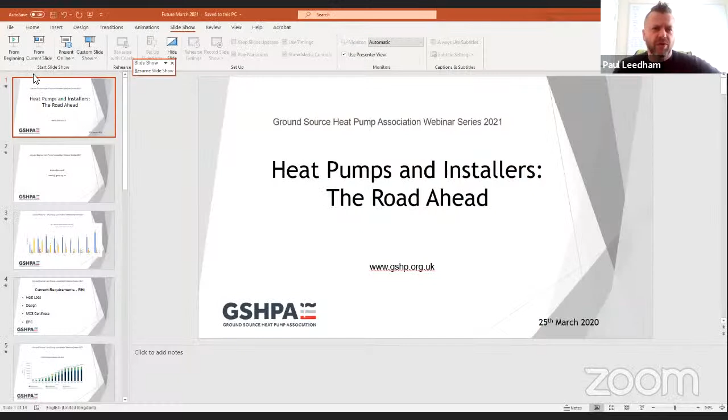My attempt here is to give you some kind of insight into heat pumps and installers and the road ahead. For the intuitive ones of the group, in the bottom right hand corner, you'll see that I wrote this a year ago. Actually, I am fibbing - I made a mistake with coronavirus and everything. It actually says 2020, it should say 2021. So, heat pumps and installers, the road ahead.

Here's some information with regards to contacting Ground Source Heat Pump Association initially, admin at gshp.org.uk, and gshp.org.uk website. There'll be some details if you want to ask further questions outside of this later with regards to Secretariat.

This is data that was gathered from MCS, Micro Generation Certification Scheme. This data relates to almost the last 10 years of the number of installations in the UK that have been registered through the MCS. The reason why I've placed this here is to give you an idea of the different technologies and the deployment over the years. As you can see in 2011, there's a relatively small number of air source and ground source installations.

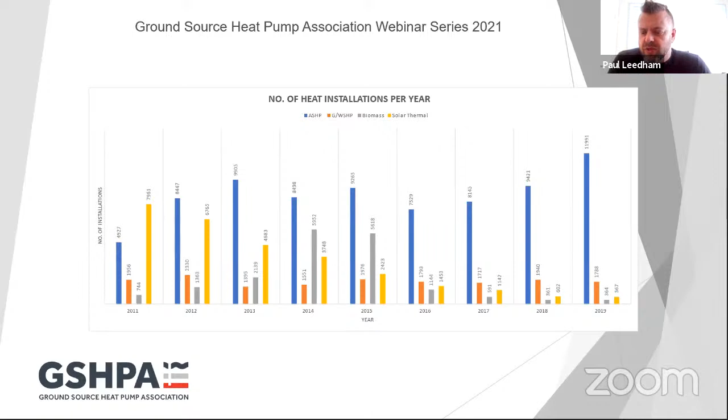Current requirements under renewable heating incentive - I know every installation doesn't necessarily go for renewable heating incentive - and the non-domestic renewable heat incentive is about to end this month, and we only have a year left of the domestic side. The requirements are, which is different to gas and oil in some respects, a certain size and scale.

Heat loss calculations need to be done so that we can size and scope the deployment of the heat pump. Design of the system, as heat pumps are less forgiving than gas and oil technology. So we've got to design the piping system properly, emitter system, collector system on heat pumps, pump sizing, etc. We also need to certify under MCS, and on domestic schemes, we need an energy performance certificate. It's just to give you some background, really.

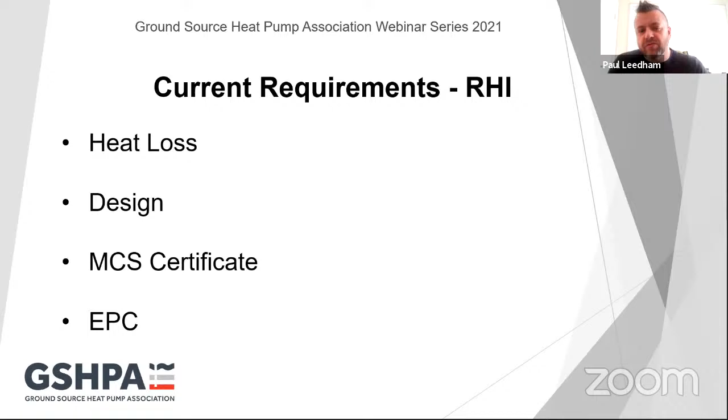There's going to be a much varied background of people watching this. It's just to give an idea of the differences in some respects compared to what we have at gas and oil level.

So this projection, there's many projections out there, and this is just one of many with regards to deployment in the UK for heat pumps out towards 2028. The year I'm going to pick on is 2028 at the moment, because in Boris's 10-point plan last year, Boris declared he wants, and the government, to see 600,000 installations in 2028 alone. This gives an idea with regards to the deployment, the ramp up, scale up, and the deployment into different parts of the market.

Now, there's information from BEIS, there's information from HPA, GSHPA, and this is one of many, so it gives you an idea. In 2028, the deployment number is 714,000 heat pumps. So Boris has gone a little bit more conservative, no pun intended, 600,000 heat pumps per year.

So the potential number of installers that are needed, in this particular example I've seen a BEIS document where it calls for 60,000 in 2028. 26,391 - so the reason why I've put these two slides on here is, if we flip back a slide, 714,000, you can see in 2020 that we only have an estimated 36,000 heat pumps to be deployed. 2021, 72,000. And I believe some of these projections were based on things like Green Homes Grant and other incentives.

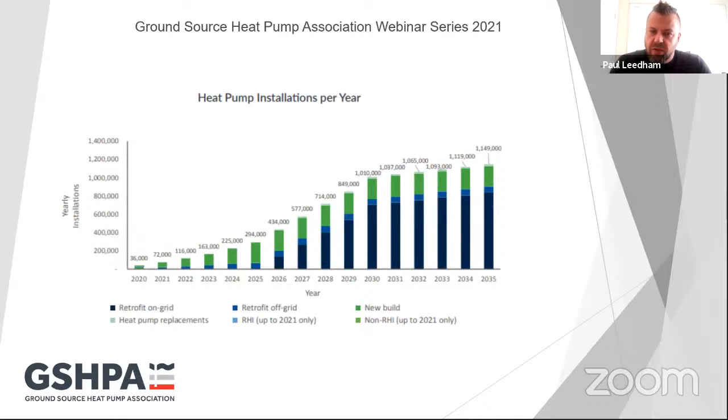And we'll come on to those in another slide. But the political will is there, the target is there. And obviously we now have to try to gauge how we're going to get there. So the number of installations - but you can't install anything without a workforce. So the workforce has got to increase.

So if we only install 20 to 30,000 heat pumps a year now, and if you look at the figure of 600,000, it's between a 20 and 30-fold increase in the deployment of heat pumps per year. And if we say that the number of installers has to change by the same factor, there are only around just over 1,000 trained installers to MCS accredited standards. I might hasten to add, there's other people out there installing much larger equipment that don't fall under the MCS category. But that number would then need to increase by a factor of 20 to 30.

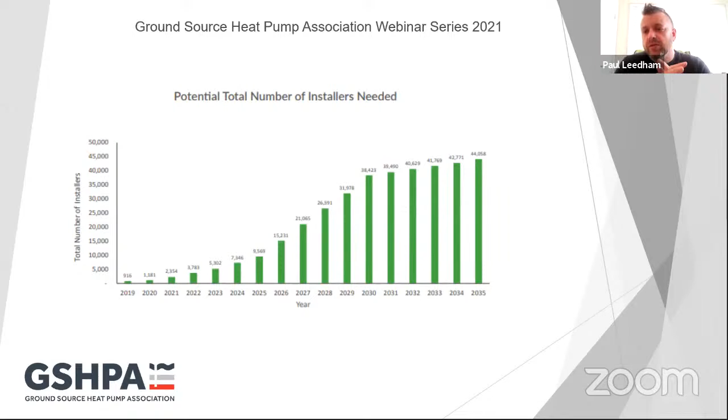And I think this is where this conservative estimate came through. So again, 20 to 30,000 installers. BEIS wants to see 60,000. There's no doubt that we obviously need more installers, more trained and more credible installers out there to then deliver the numbers that are in the 10-point plan.

So what does it demonstrate, the information that we have so far? So it demonstrates political will. It demonstrates an appetite for change. It demonstrates a shift in focus and thinking, and it specifies, more or less, heat pumps specifically in the 10-point plan, and other documents, for instance, like the Future Homes Standard, low carbon technologies, and references made to heat pumps in there.

So over the years and over the RHI period that we've just gone through for the past 7 years, especially on the domestic side, what we're starting to see now is the emergence, and really I suppose the year of the heat pump, where the heat pump now is put on a pedestal, and a lot of shifting focus from manufacturers, training organisations, trade organisations, everyone pushing in the direction of heat pumps. And again, from the 10-point plan, the government as well.

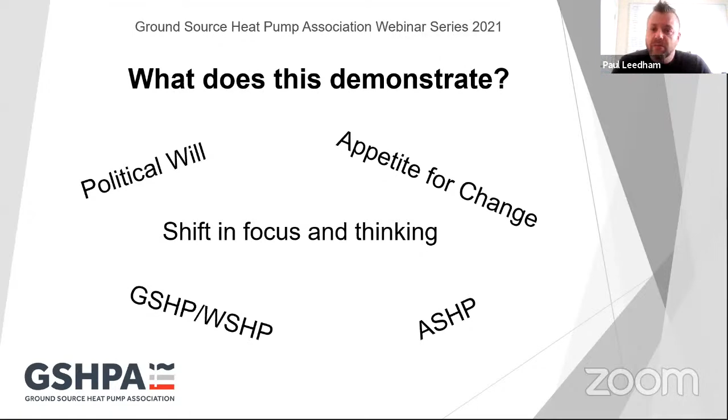So an extract from that: developing greener buildings could deliver around 50,000 jobs in 2030, around 11 billion of private investments, savings of 71 million tonnes of CO2 between the years of 2023 and 2032, and a 16% reduction in UK emissions compared to 2018.

So again, the ambition of 600,000 heat pumps per year by 2028, future home standards reference and zero carbon ready, green home finance initiatives, and the green banking system that's been set up. To target milestones again, set out a heat and building strategy 2021, launch a world-class energy-related product policy framework, and by 2032, ensure the public sector has reduced its direct emissions by 50% compared to 2017.

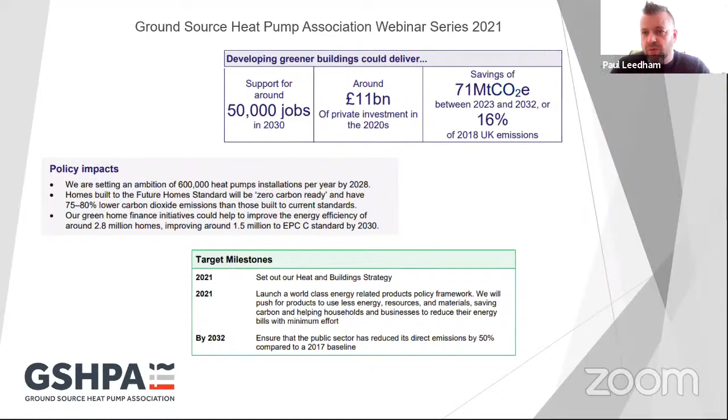So I think we can all see, and we all agree, that obviously we have a political appetite and a target, and it's really, I suppose, how we can deliver that into the UK market. So what we've had on incentives so far - excuse me while I just have a slurp.

I'm sure we're all familiar with Renewable Heat Incentive, which is due to end in March 2022. Green Homes Grant, although I think the intentions were right, the deployment, delivery, hasn't been as slick as what it could have been.

And in some respects, because we already have an industry that is saturated with work as we come towards the end of a tariff system with RHI, especially non-domestic RHI, and then domestic RHI, which is soon to follow. I think the timing for Green Homes Grant was incorrect, even though it was meant to be a stimulus for the economy.

And obviously, the situation we found ourselves in over the last year, globally with the pandemic, I think the intentions were right, but maybe some of the thinking may be incorrect. So Green Homes Grant has seen the funding slashed, and yes, there's been some difficulties with regards to deployment from installers into properties.

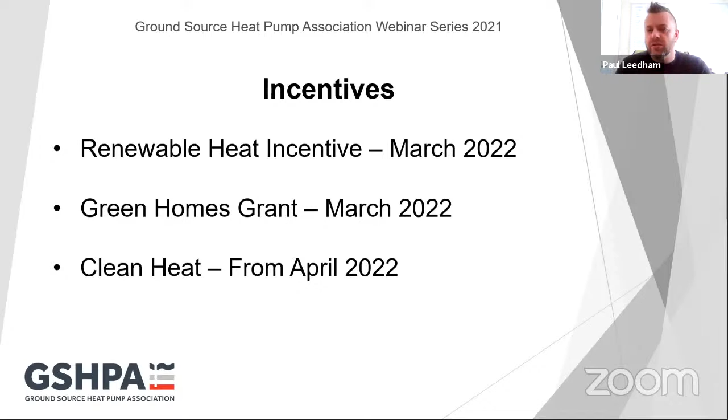It's not gone as well as what it could have. However, Clean Heat from April 2022 is under consultation at the moment, and all the lessons we've just learned from Green Homes Grant can then be applied into the Clean Heat Grant. That's what I'm hoping, but again, that's under consultation. No decisions made at the moment. There was a £4,000 grant given in the consultation, so this is what we're thinking of giving. There's been many responses saying it's not enough, and different changes, etc. But that's got another stage to go through at the moment.

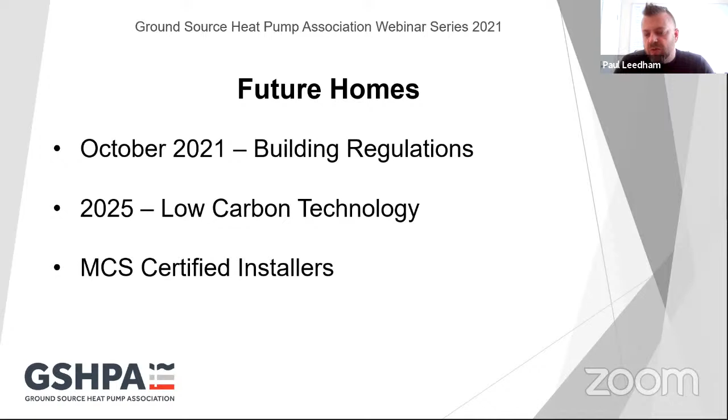Future Home Standard, October 2021. Potentially a change in building regulations as a step towards future homes. In 2025, for the Future Homes Standard, it's looking to take on a low carbon technology strategy with reference to heat pumps in there. And with regards to new build properties in the years ahead, it's looking like there's going to be a requirement for MCS certified installers to install in new build properties, which in my eyes is good, because there's nothing out there at the moment, no standards or anything other than just building regulations, but nothing that's recognised with regards to any kind of quality management on heat pump deployment into new properties.

Only if it's something like a self-build where someone wants to claim RHI. So changes which are coming, which will be beneficial for installers, is streamlining of the MCS process, because it's a quality management system, and those systems tend to be more designed and determined for larger companies, rather than one to two person companies of installers that maybe want to subcontract. There'll be more support tools through MCS, through manufacturers, through training organisations, through other organisations, to support the deployment of heat pumps, selection, design, etc.

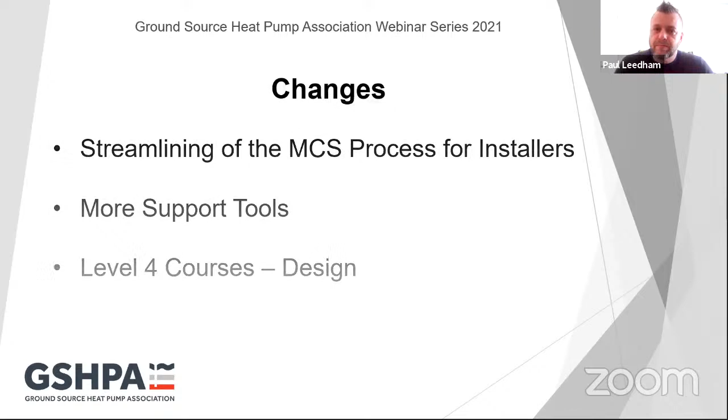And there's a level 4 course based on design being developed at the moment. So the level 3 course has been changed and completed, which is for installation. The level 4 course has been pioneered by Exeter University at the moment, and recently went through a pilot scheme. So again, new training released to the MCS framework, which is the level 3 courses, which are available now. The level 4 design course, which I've just mentioned, has gone through the pilot, and it's in the stages of being updated, with a discussion between MCS, Exeter University, and other stakeholders with regards to what wants to be seen in a design course.